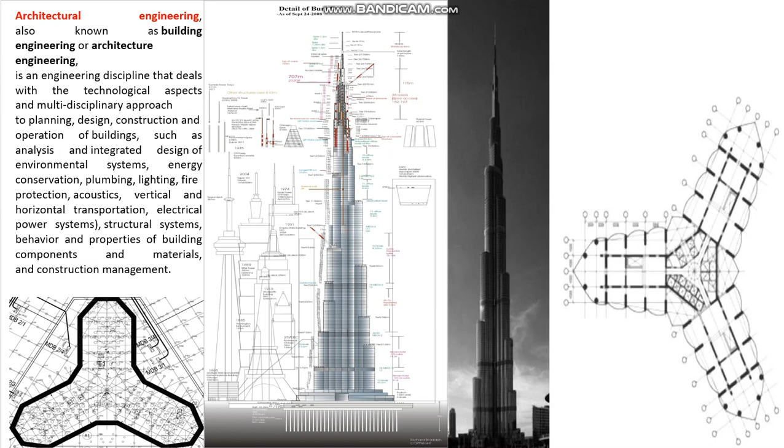From reduction of greenhouse gas emissions to the construction of resilient buildings, architectural engineers are at the forefront of addressing several major challenges of the 21st century. They apply the latest scientific knowledge and technologies to the design of buildings.

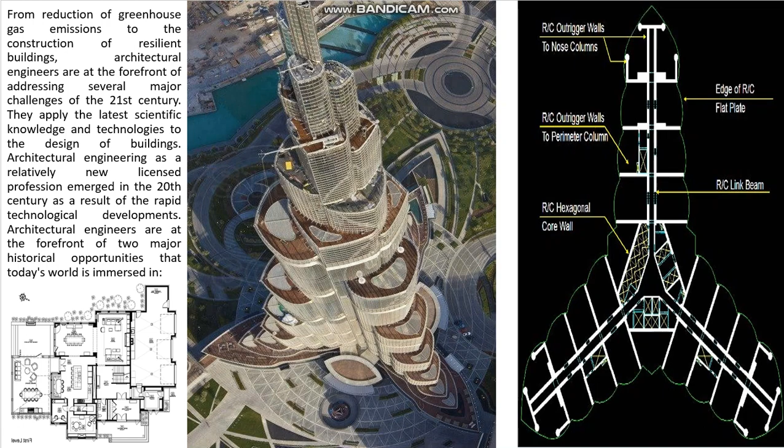Architectural engineering, as a relatively new licensed profession, emerged in the 20th century as a result of rapid technological developments. Architectural engineers are at the forefront of two major historical opportunities that today's world is immersed in. First, that of rapidly advancing computer technology and the parallel revolution arising from the need to create a sustainable planet.

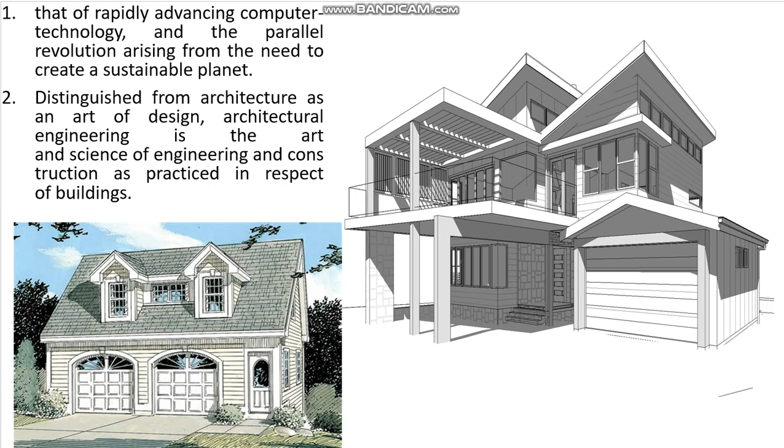Second, distinguished from architecture as an art of design, architectural engineering is the art and science of engineering and construction as practiced in respect of buildings.

Architectural engineers apply practical and theoretical knowledge to the engineering design of buildings and building systems. The goal is to engineer high-performance buildings that are sustainable, resilient, economically viable, and that ensure the safety, health, comfort, and productivity of occupants.

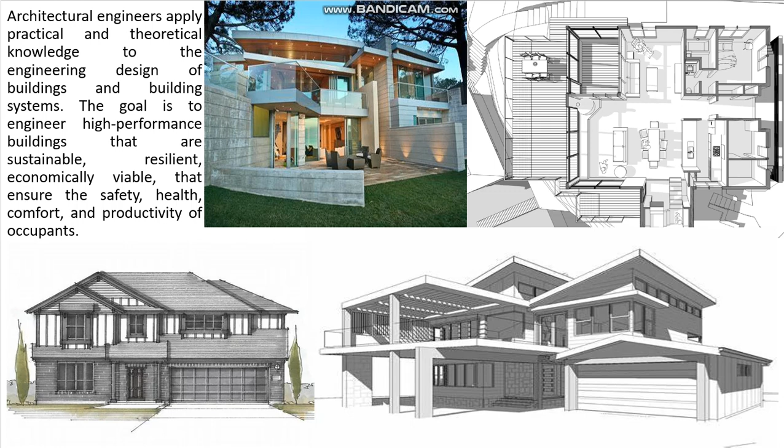Uniting scientific principles from structural, mechanical, electrical, lighting, acoustical, and construction engineering, architectural engineers apply their discipline-specific expertise to conceptualize, design, construct, operate, and maintain built environments in interdisciplinary team environments.

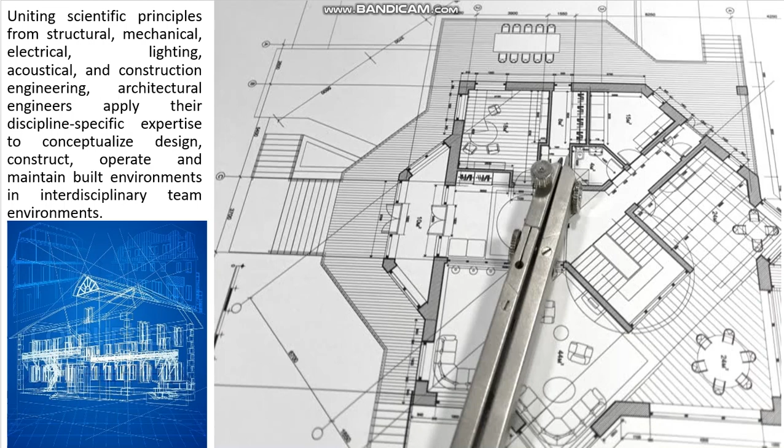Graduates of architectural engineering are widely considered to be creative systems engineers, with formal training in creativity and design through architectural design studios, married with a solid engineering education. Architectural engineers have a lasting impact on society because people spend 86% of their time indoors.

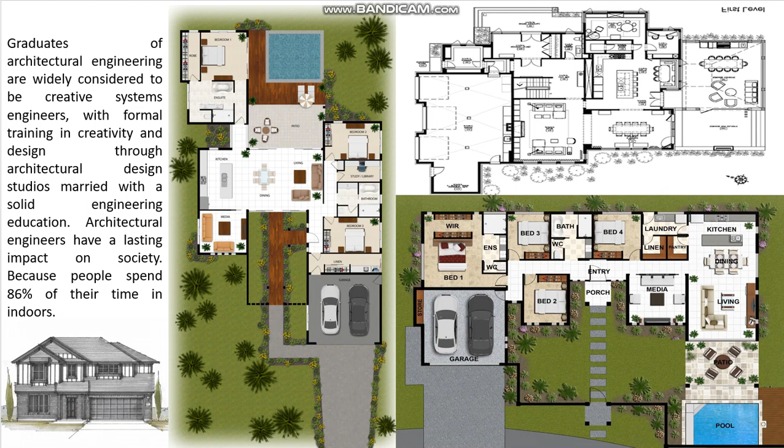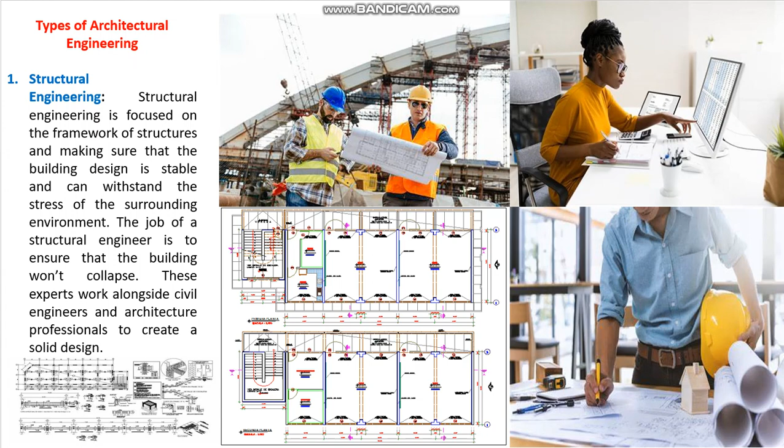Types of architectural engineering. First, structural engineering. Structural engineering is focused on the framework of structures and making sure that the building design is stable and can withstand the stress of the surrounding environment. The job of a structural engineer is to ensure that the building won't collapse. These experts work alongside civil engineers and architecture professionals to create a solid design.

Second, mechanical engineering. Mechanical engineering professionals deal with the design and development of buildings' electrical systems, sensors, and machinery. This includes the HVAC system, plumbing, electric generators, and rain gutter systems. Mechanical engineers also design other machines that will operate inside the building, such as elevators and escalators.

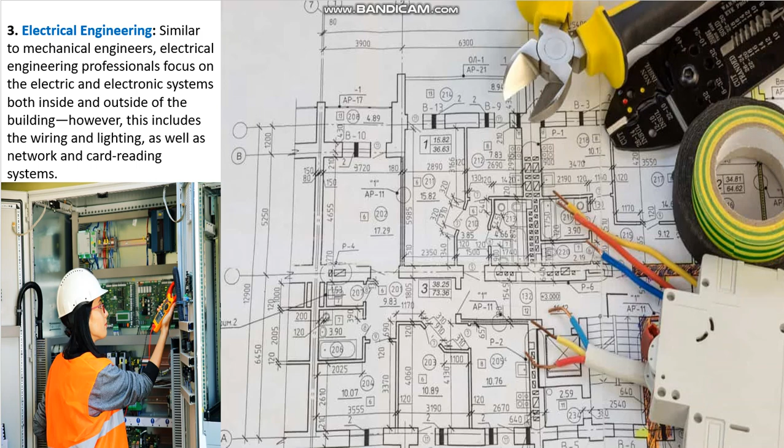Third, electrical engineer, similar to mechanical engineers. Electrical engineering professionals focus on the electric and electronic systems both inside and outside of the building. This includes the wiring and lighting, as well as network and card reading systems.

Some other types of architecture design. Residential architect - the name itself indicates the job role of such architects. These architects are sort of private architects, dealing with clients on a personal basis. It generally means they are, besides commercial architects, more involved in negotiation.

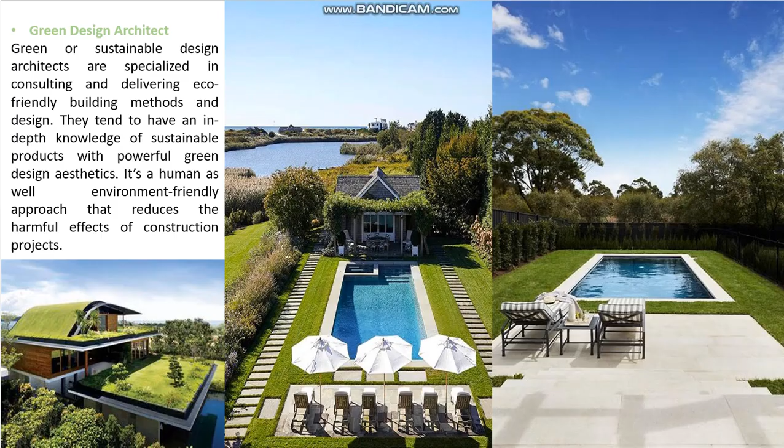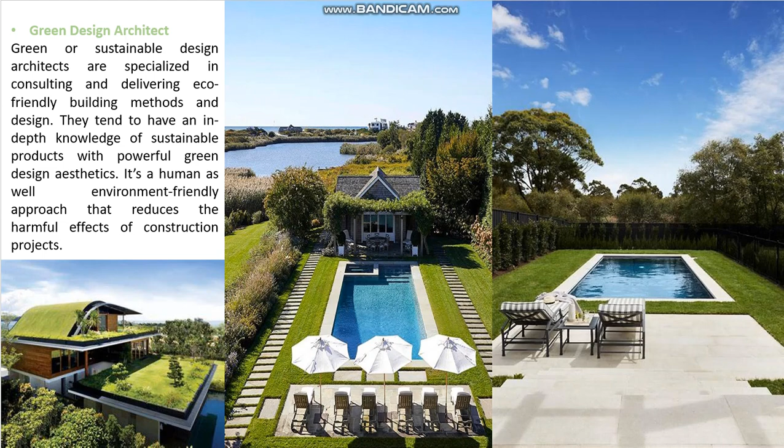Green design architect. Green or sustainable design architects are specialized in consulting and delivering eco-friendly building methods and design. They tend to have an in-depth knowledge of sustainable products with powerful green design aesthetics. It's a human as well as environmentally friendly approach that reduces the harmful effects of construction projects.

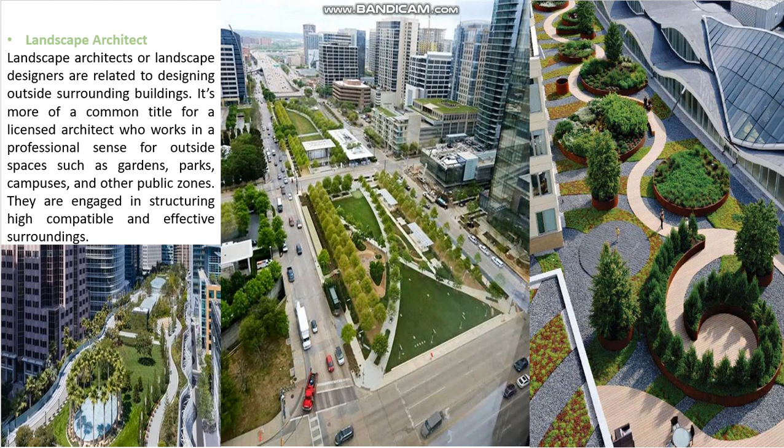Landscape architect. A landscape architect or designer is related to designing outside surrounding buildings. It's more of a common title for a licensed architect who works in a professional sense for outside spaces such as gardens, parks, campuses, and other public zones. They are engaged in structuring highly compatible and effective surroundings.

An interior architect is another licensed architect who is specialized in interior procurement and designing of interior projects. They are predominantly found in large firms because of their specialist nature. They kind of stitch the inside apartment. Before you get into the lucrative career of an interior designer, you must know the difference between a decorator and a designer.

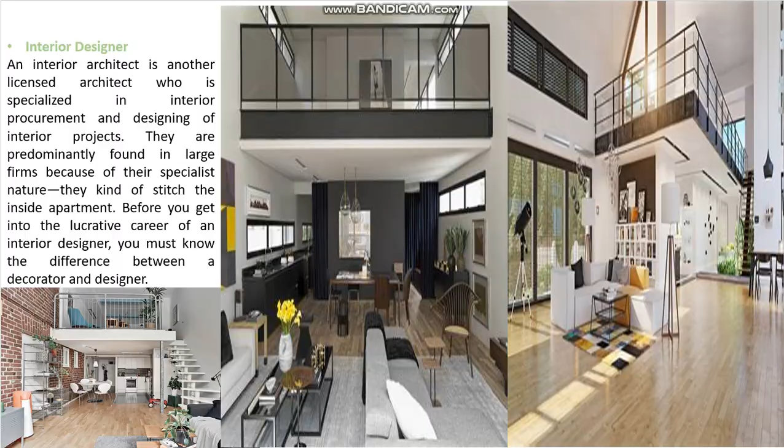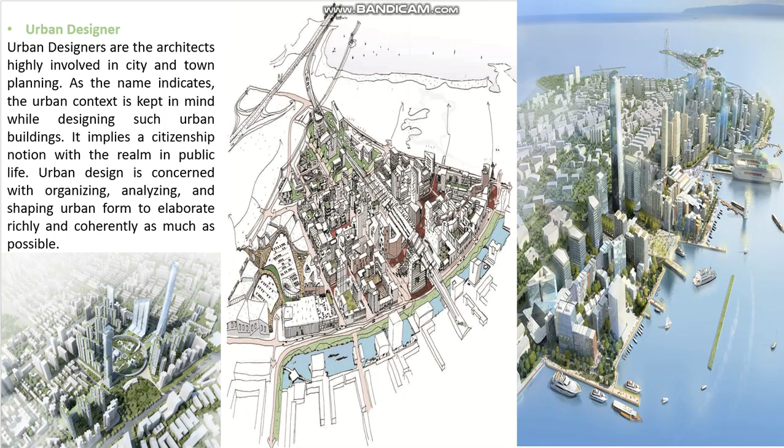Urban designers are the architects highly involved in city and town planning. As the name indicates, the urban context is kept in mind while designing such urban buildings. It implies a citizenship notion with the realm in public life. Urban design is concerned with organizing, analyzing, and shaping urban form to elaborate richly and coherently as much as possible.